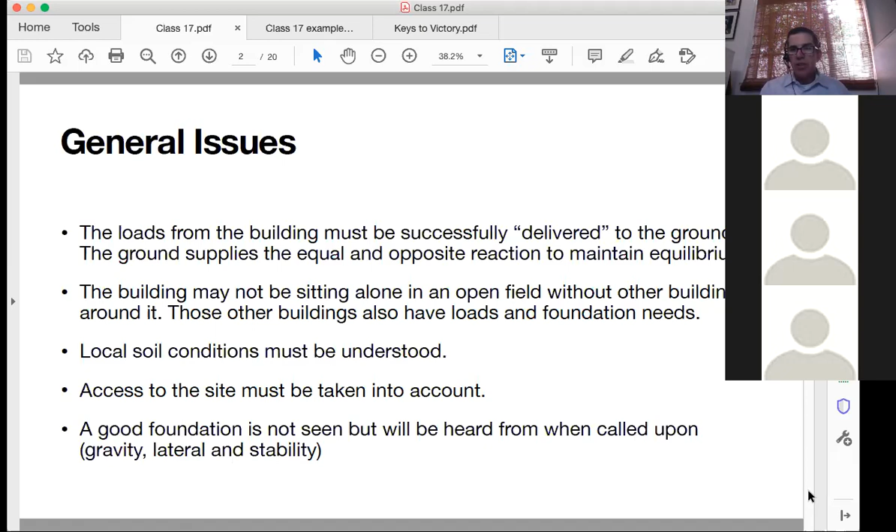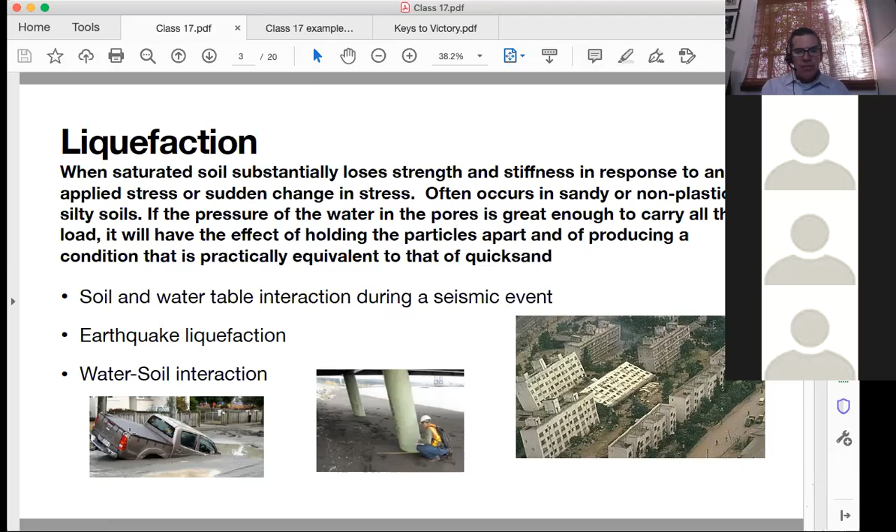So very stunning sort of pictures, really nothing to really do a whole lot with what we were talking about today, but just sort of shock value, I guess. So from a construction point of view, excavation, site shoring - these are the topics that we'll be going over today.

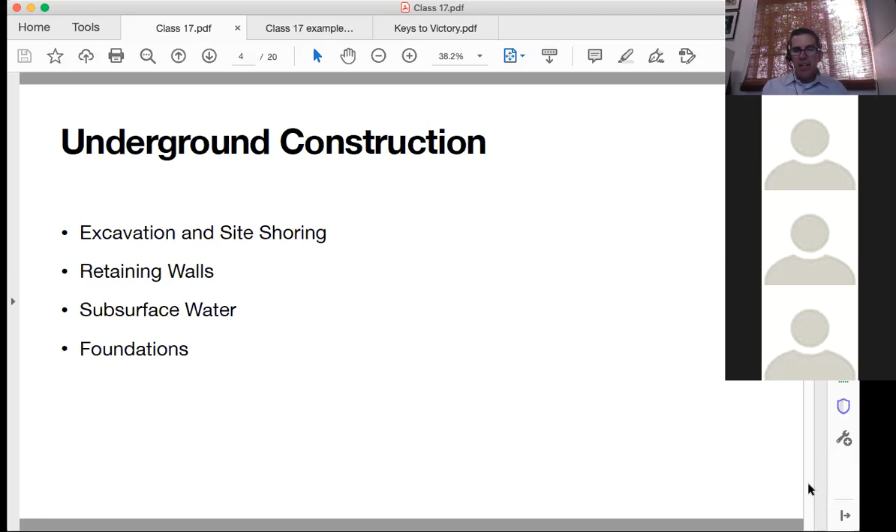We'll look a little bit at retaining walls. We'll go very lightly with subsurface water - it's actually quite an interesting topic, but we're not going to spend much on that. And then we'll do a little bit here. This will be with the calculation at the end, a little bit with some of the foundations, sort of a little bit more typical foundations, some column foundation, and then a caisson or a drilled pier.

So often with projects, especially large scale ones, there's an issue with excavating, either foundationally to get down to bedrock, or because the building is going to have a subterranean component to it, and that excavation could be on a slope. Just think if you were to not dig on a slope, then you would basically be creating a cliff, and that cliff would have instability. So the sloped excavation might be used.

If not, then vertical shored excavation could be used, and we'll go over what this sort of temporary site shoring would be called, and this would be something that's engineered, which then gives for really kind of stunning pictures.

So some of the excavation process - these temporary site shorings would be, kind of read these five that we're going to look at, get you exposed to some vocabulary.

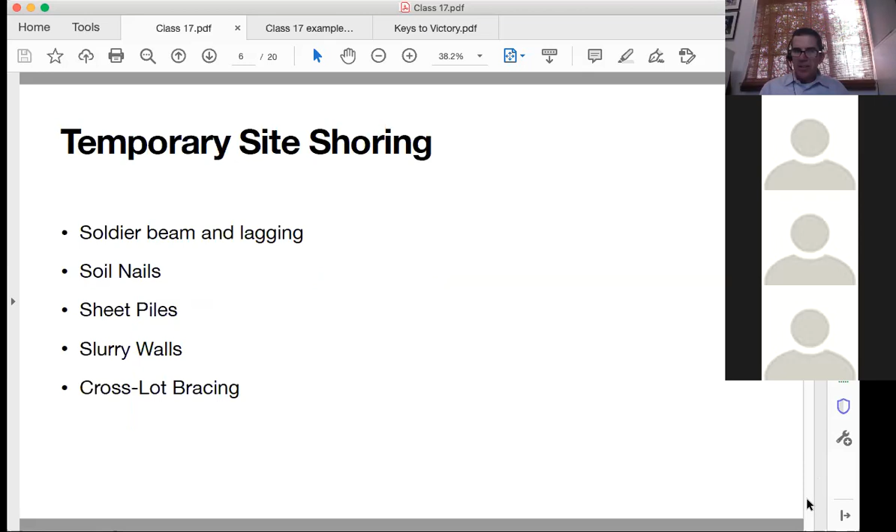That last one we saw, the first one, had quite a vertical wall. Not all are going to be that drastic or large.

So it's the soldier beam and lagging. Where that soldier beam is, really it's a drilled pile down into the soil, and then as you excavate...

...they're able to fill in with lagging, it's called. So you've got drilled shafts for the soldier beams. Those are I-beams, and then they're spaced such that you've got wood lagging that's going to be put in there.

That then would be shoring the site. The lagging placement depends on the height and how much lateral pressure you end up with from this earth. That earth really wants to move in this direction, it wants to fall this way. And the further down you go, the more pressure is present.

It's kind of analogous to the deeper you go in a pool, how it hurts your ears. So you end up with more pressure down here. Sometimes you may need a little bit more assistance from the bow that could occur, so you may end up with tiebacks that need to be inserted.

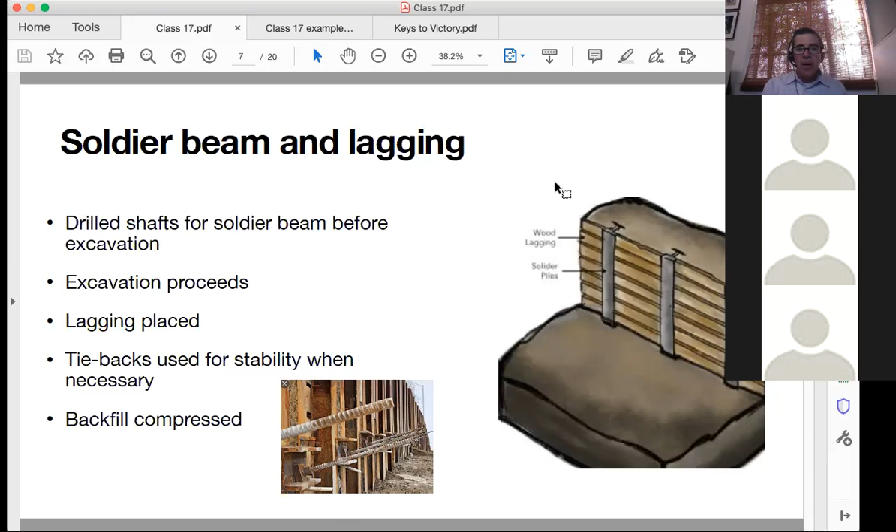Another one would be a soil nail wall. Those tiebacks in the other picture were less frequent - you don't see any up here, but you see a row of them here. They're spaced, relatively close to each other, but from a vertical distribution they're not as closely spaced as a soil nail wall.

This excavation occurs in layers, about 5 feet at a time. So here you're just seeing the very end, after they've excavated the entire thing. They start up here a row at a time, and as they go, install the soil nails in each of those, about 5 to 6 feet in each direction.

So you think of the 5 by 5 spacing, and then apply a thin layer of shotcrete with each layer of excavation. It's kind of like nailed, but you see the frequency of those - very different than a tieback. Again, there's a limit to exactly how high those can go.

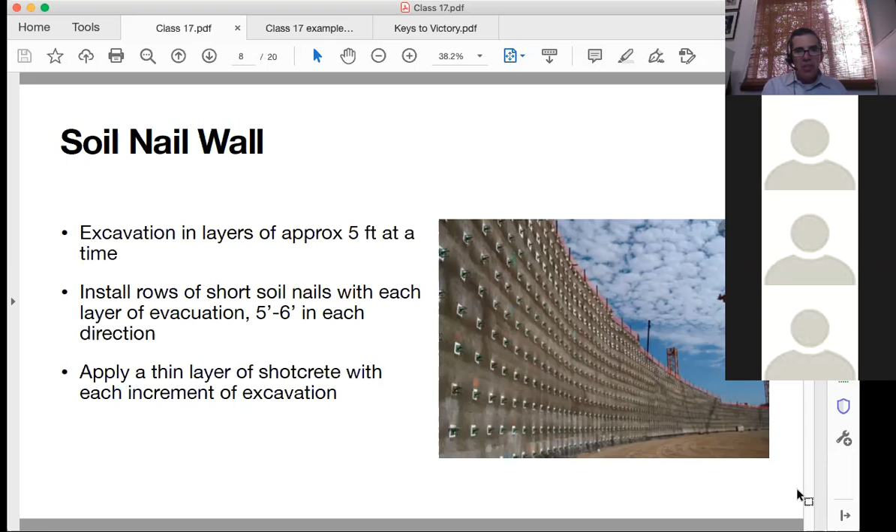You're really dealing a little bit more with just the construction issues of which one might be used, either the soldier beam or a soil nail wall.

Sheet piling can also be used, and it's going to go straight down - it's driven down in. There's a drive effect to this thing; it doesn't just sink down in, it has to be pushed down in with repeated blows at the top. We'll get to that also in another one a little bit later with driven piles.

Sheet piling can also be used as a water barrier. The way it interlocks, it's going to use the soil pressure to its advantage in that regard. Then it can be cantilevered, or it could also be tied back depending on the height of it. Gets higher and higher, then you would need to put tiebacks in.

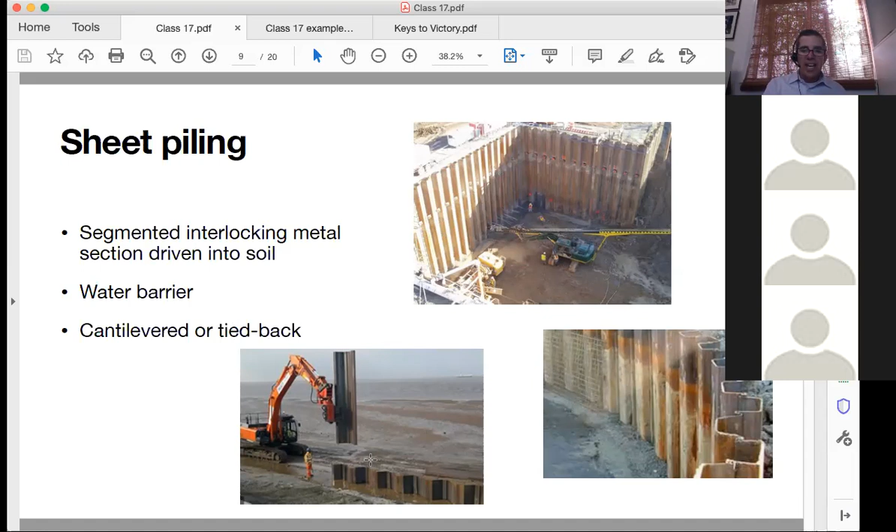Again, really more of a stability issue. Then the excavation can occur on one side - once it's been installed, you excavate on one side of it, clearly.

And then once that's all done, then place the concrete from the bottom of the trench, displacing the slurry. So that slurry is kind of like this temporary holder of sorts - the concrete is what ultimately is going to go down there to be our wall.

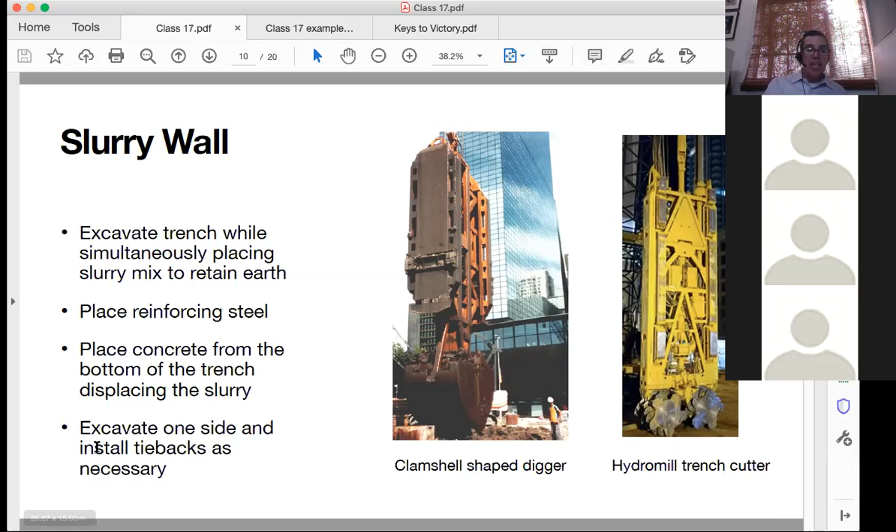You excavate one side, and you can install those tiebacks as you excavate. So that would be a slurry wall.

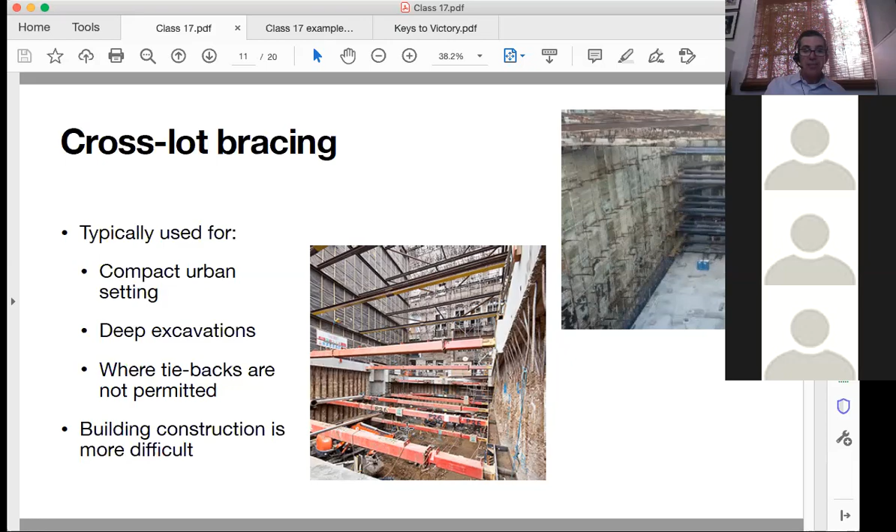Here would be some cross-lot bracing. You could see multiple types on a job site, but this would definitely be in a downtown area with high buildings around, urban settings, deep excavations where tiebacks are not permitted. It could not be permitted because there's some neighbor issue going on, and you can't get anywhere close to their foundation, so you'd have to build something without tiebacks that reach all the way back. So then just in general, some retaining walls.

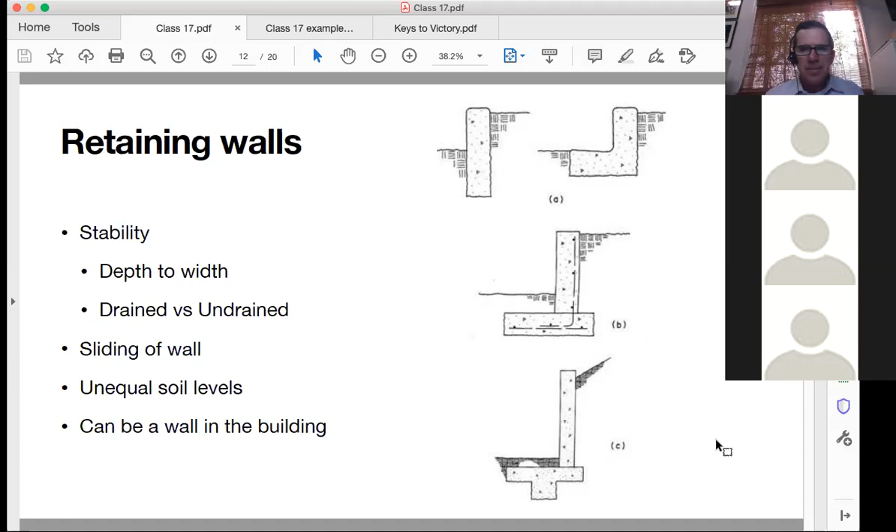All right, I'm back, thank you. I don't know what it is, but my shoulder keeps getting tight when I do this. Perhaps I never really thought I'd be doing this. If you notice my light, I got one of these babies now. So anyways, if I look a little brighter, that would be why. Okay, as my computer starts to run — I think the other thing that's going to happen as this quarter comes to an end, I have a feeling my computer is going to walk off into the sunset as well. Boy, that little feller likes to run. Oh man, poor guy.

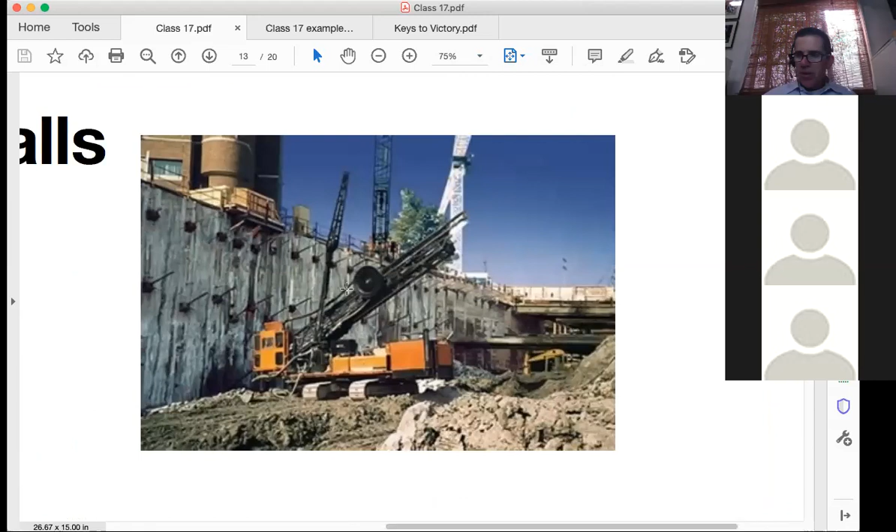So there's a little bit of a look at this thing as to where the drilling goes, and then a section as to where the bonding goes, the grout which is injected, and then the jack, and then there's a plate and an anchor head. And so that's what gives, right, getting all the way back away from the wall.

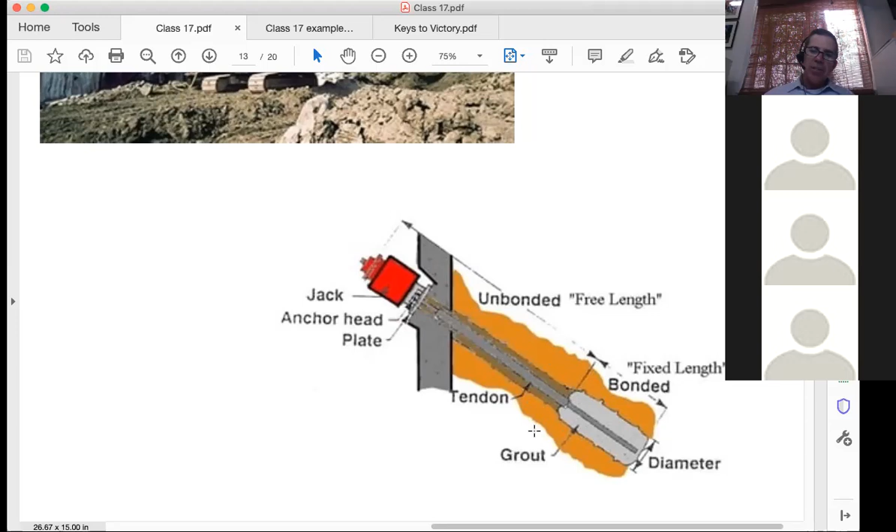And then this is the amount of bonded length. This is done to get far enough into the soil. We need to get deep into the soil so that there's not a local failure of the soil. So that's why this wouldn't just be right here, because that whole load gets distributed out into the soil. It's sort of the general theme of the foundation process.

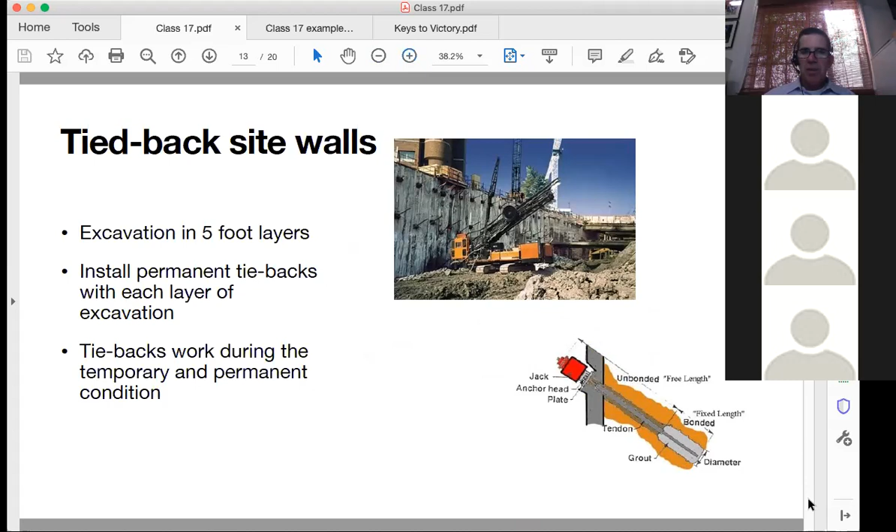But here, same thing with these tiebacks, so give you a look at that. That's why that would generally be something pretty expensive due to the machinery, and that's why we had brought up that issue about access to the site as well. So I'm just going to go quickly on this with water.

It could be a water table issue, which is present even if you can't see it. And then sort of the idea of the local and then the global, so that you can have localized failures or water, global failures in water.

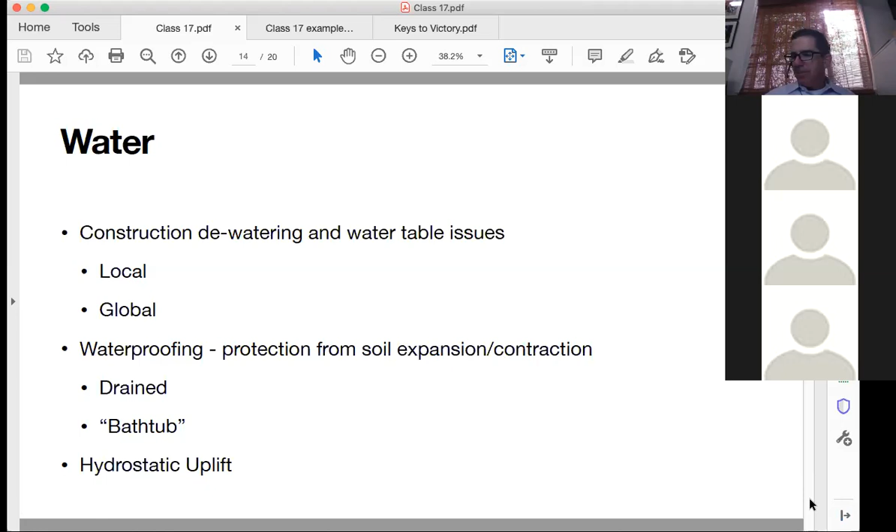And so the issue comes down to the expansion and contraction of the soil. So when the water leaves, the soil then contracts. As it's there, then there's expansion. And so the other side of that is, if there's soil expansion, that actually pushes on your building, and that would be what's called hydrostatic uplift. So not a huge amount to worry about there, but an issue nonetheless.

All right, getting into the home stretch here. So we're going to go a little bit with foundations. There'll be a little bit of calculations on the back end of this. So this is the piece that we'll do. There'll be a little bit of this on homework 4, something that deals with a foundation calculation.

So this is where those loads are transferred to the soil. They could be in multiple directions. Primary failure is going to be settlement. When we say settlement, it would be the structure settling on the soil. This is why, with high-rise buildings, those are drilled foundations that go all the way down generally to bedrock, so that there is less of a settlement issue with the weight of the building settling on the soil.

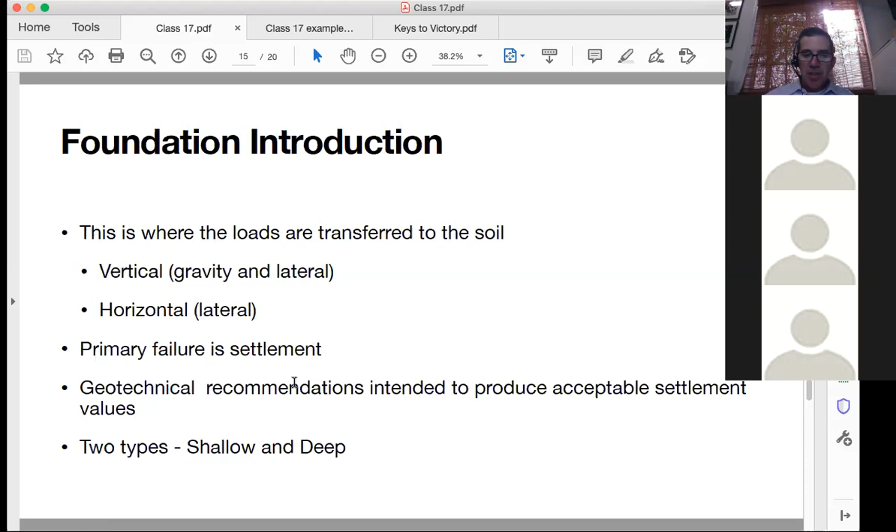This is where a geotechnical engineer would give the values. There'll be an allowable bearing pressure that we'll talk about, and then also an allowable friction, so shear stress, and two types, shallow and deep. So we'll go through both of them.

So this would be footings. You see with a column slash wall footing, it could be combined, very much most common. And so you see here the pad, the footing underneath the column, which will eventually tie to it. Now these are rebar that's permanent, that's been cast with the foundation. And so there'll be a cold joint there, and then you'll have more rebar that'll go to the column above.

And to do this, we need adequate soil bearing pressure. So this really just sits, now it's embedded in there. It's not stopped right there, but at the very bottom it's just sitting, sitting on some soil, as you see here, where something would be poured and then it would be filled again. So this is not going to be for something substantial, but from a size standpoint.

And so we're talking about the pad here. The area is going to be the load divided by the allowable bearing pressure. So the pressure is going to be like in pounds per square foot or kips per square foot. That load is the load in the vertical direction that we would know is being delivered from the structure—gravity and seismic, depending on if it were part of the lateral system. And again, there can be a combination.

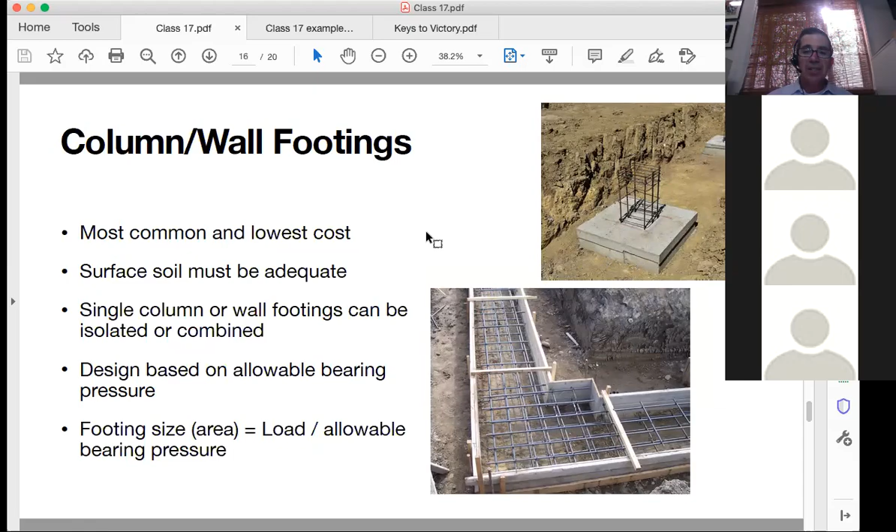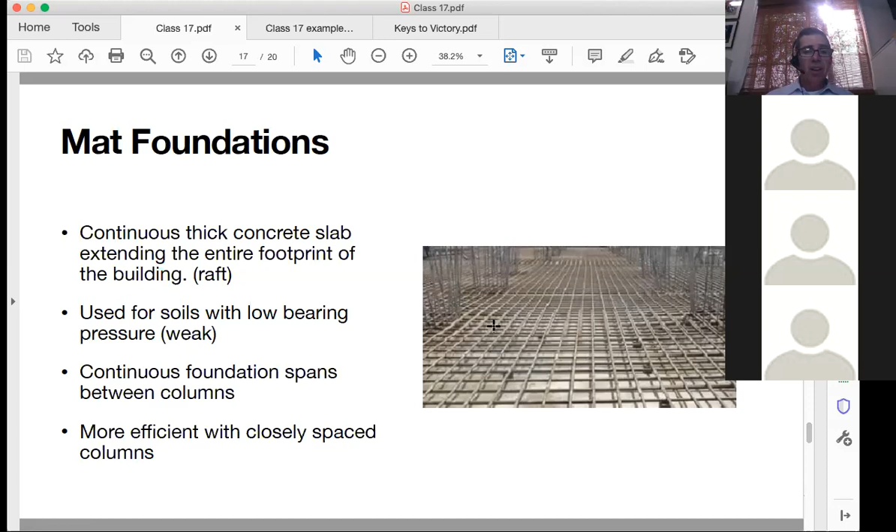So in a situation like this, if you had weak soil, the cost is that between the columns it's a continuous span, so that all has to be continuous and act in a monolithic fashion. It'd be efficient for something that had columns closely spaced.

Often used on large construction projects like hospitals. Deep foundations - those first couple were all shallow foundations with little excavation needed. Deep foundations include drilled piers, caissons, and driven piles. Generally these would be higher cost, but used to get to bedrock when necessary, but also just to help with increasing surface area for settlement and uplift.

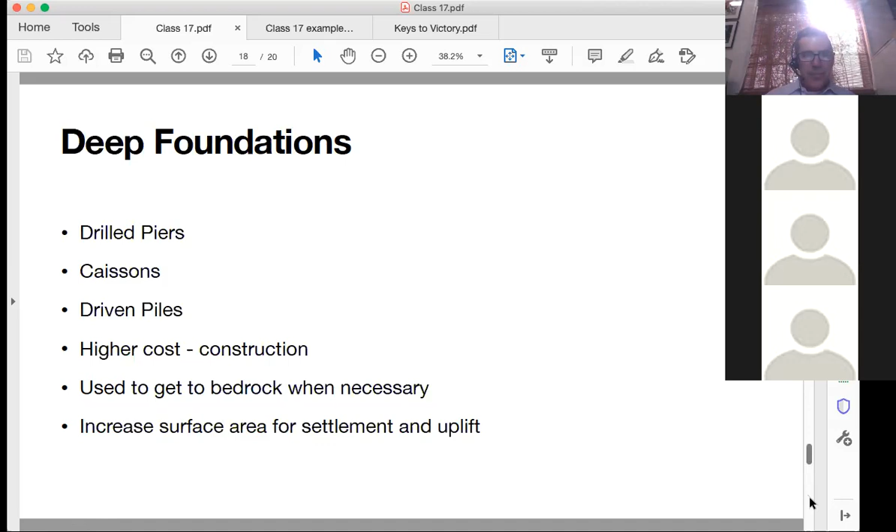So we'll talk about the two ways that these are generally designed. Let's take a look at all of these here. So a drilled pier, exactly what it sounds like - that's a huge drill that is turning, right? Going straight down.

So it's a straight or belled drilled shaft is what these would be used for. They're going to be filled with concrete, reinforcement steel cage. Casing might be needed to prevent the soil from caving in on itself. Now, I'd highlight this word relatively quiet. I mean, you'd think that would probably make a little bit of noise, but compared to the driven piles, that's why we'd say relatively quiet.

Two ways that the analysis would occur here: if it's based on friction, right, friction that would be on the edge, on the surface of the foundational pier. So the length is going to be equal to the load divided by the allowable friction times the diameter.

I think I have that wrong. Give me one second here. Actually, let me hold off on that. Hold on. So I've got that wrong, actually - that would be the circumference. Sorry, that would be the circumference. You'll see that, we'll do an example on that. Sorry, got that wrong.

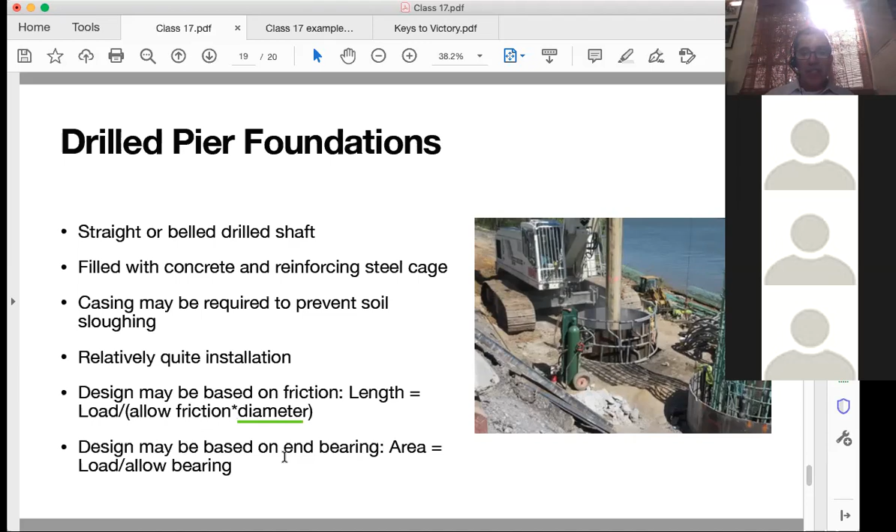Driven pile foundations - this looks like a lot of fun. We would end up with driven piles - we've got kind of an end result picture here. And so literally that is just going to pick up a weight and smash it down, and it's going to drive continuously down into the ground. This is why on that previous one, when we said relatively quiet, this would definitely not be quiet in any sort of fashion.

And so these could be precast concrete, or it could be steel that's being driven. Obviously, if it's being hit, there's a stability issue with the concrete or the steel, such that it doesn't buckle.

So it could be, in the end, based on end bearing or on friction. Allowable load is set by the geotechnical engineer and confirmed by driving resistance - actually, they'd be able to tell how far with each hit. It becomes a physics problem, an impulse momentum type of problem.

For any engineers out there, I think Allison might have a little bit of a mechanical background, so I do know that would be an ME212 problem right there. So that would be the driven pile foundations.

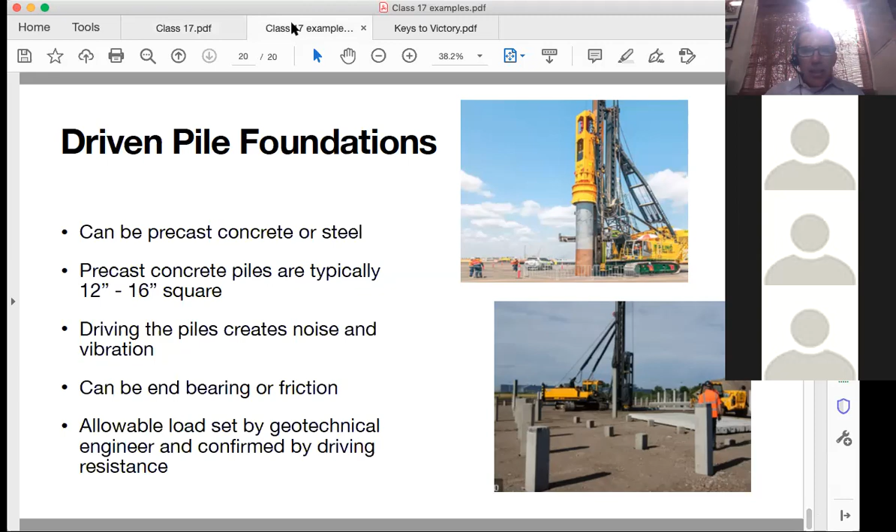So let me see if this will flip.

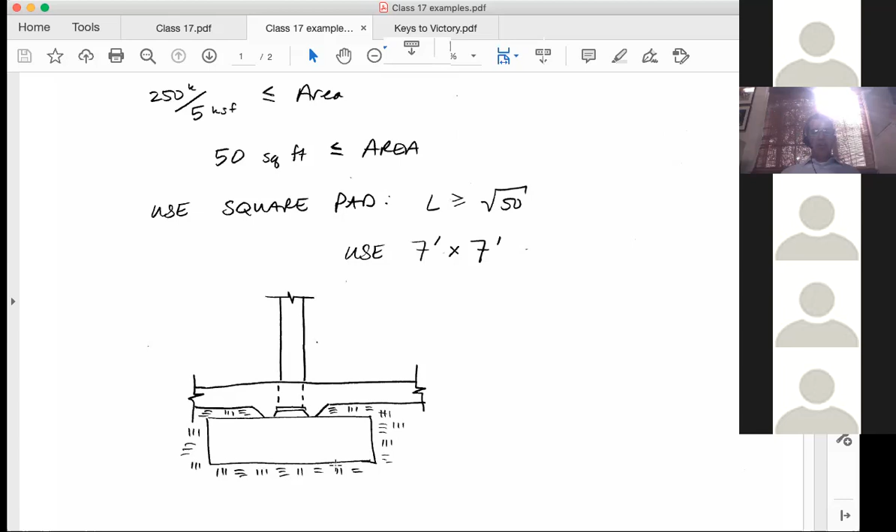But down here, that bottom, that's now where this load, which is coming down, is going to be resisted down here on the very bottom of this footing. So you see how there's more surface area down there on the bottom. So that's what we're about to go through a calculation on.

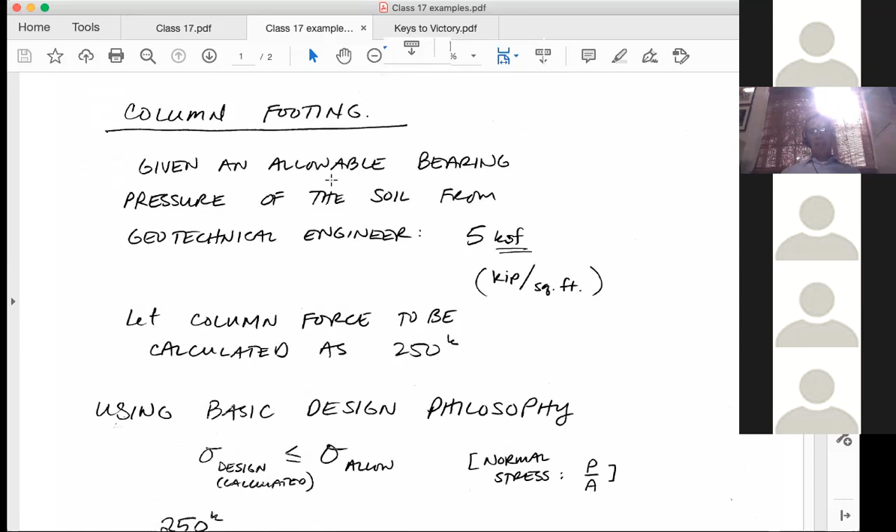So given an allowable, let you read that. The geotechnical engineer gets a soils report, and you're told the allowable bearing pressure. Now the allowable actually also incorporates a factor of safety. So it doesn't mean that if we were at 5.1 kips per square foot, we would have a failure, like our soil would not be able to bear. That's just the allowable, generally that uses a factor of safety. So it's quite multiples more of that before we would start to get into a failure type of area.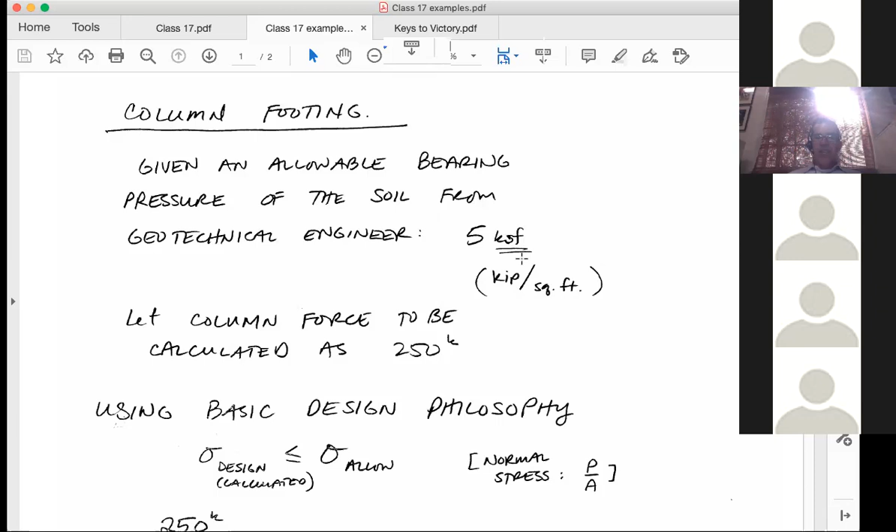So just keep that in mind here. That's an allowable, sort of a working value. That's not the ultimate value.

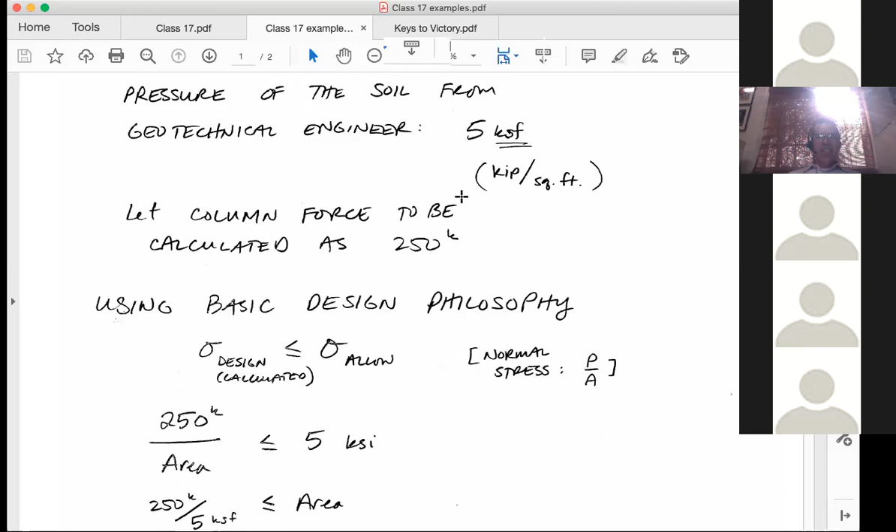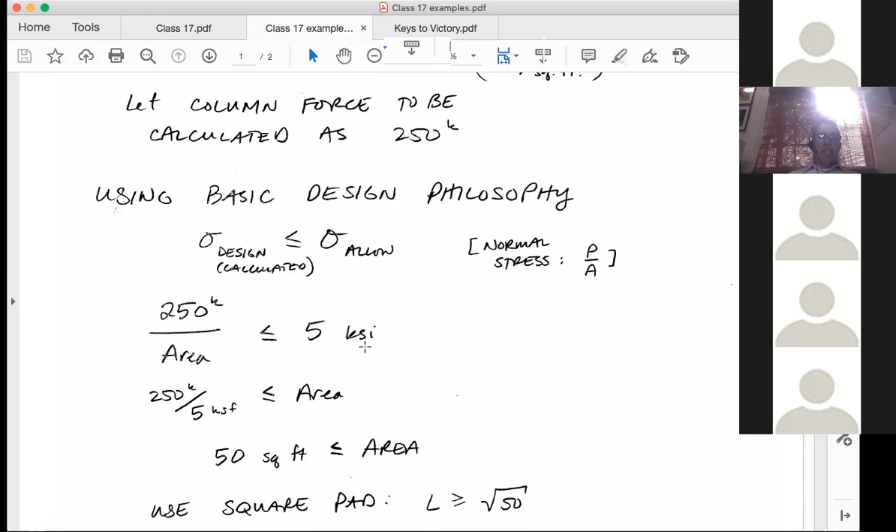So let the column force be, let's just say, 250 kips. Just basic design principle, right? The calculated, the design value needs to be less than or equal to the allowable value. So the calculated, what we calculate in our structure, this is the allowable stress design. So normal stress, P over A. This is a load from the column, could be a factored load, divided by the area, and that's the area at the bottom of the footing, and that would need to be less than or equal to 5 KSI.

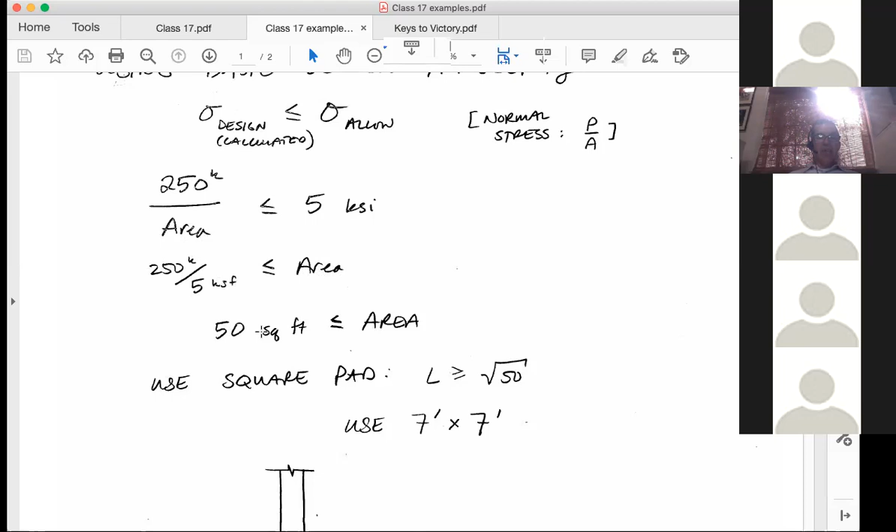And so a very simple kind of math, area will come up here. So the area needs to be greater than or equal to a little bit of math. This is kips divided by feet squared. So we end up with 50 feet squared. And if we've got a square pad, so where it's L squared, area would just be L squared, so L needs to be greater than or equal to square root of 50 if we use the square pad.

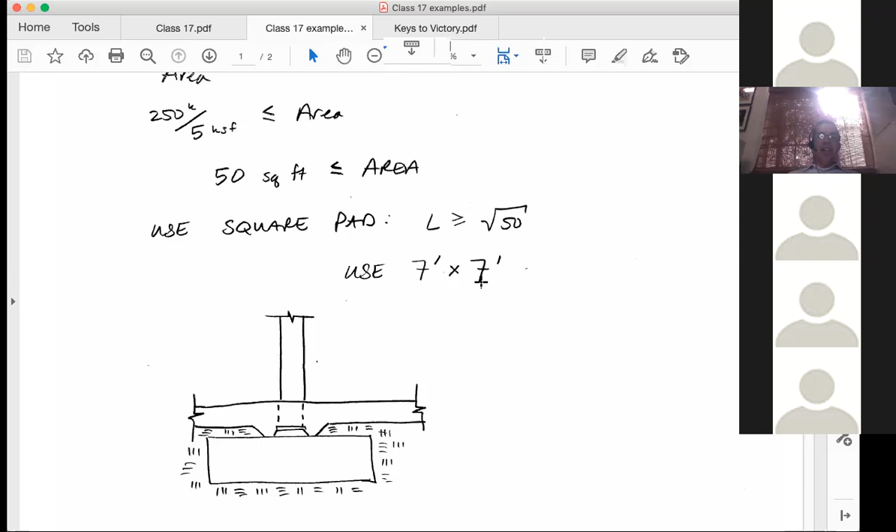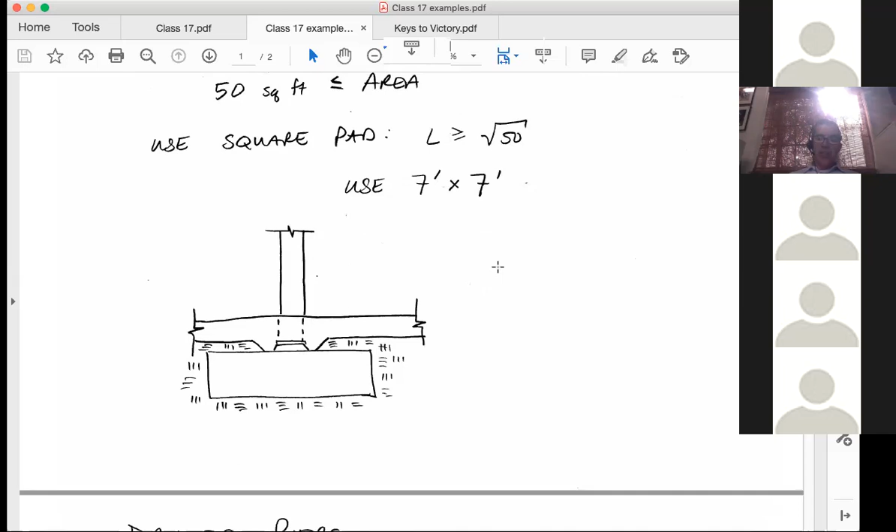All right, and then the last one here would be a drilled pier. I'm going to give you the picture of it here on the right. This would be a drilled pier of some length L, right? That drilled pier has some diameter and some length. Let's kind of take a look here.

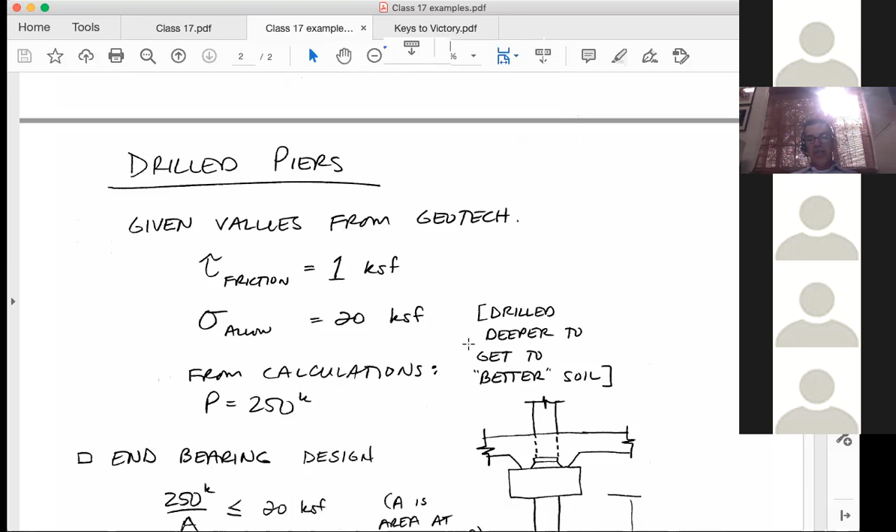You're given from the geotechnical two values: the shear stress, let's say the allowable shear stress, it deals with the friction, it's going to be 1 KSF, kips per square foot. The allowable normal stress, let's say, 20 KSF. And again, we have drilled deeper, one way to get to better soil.

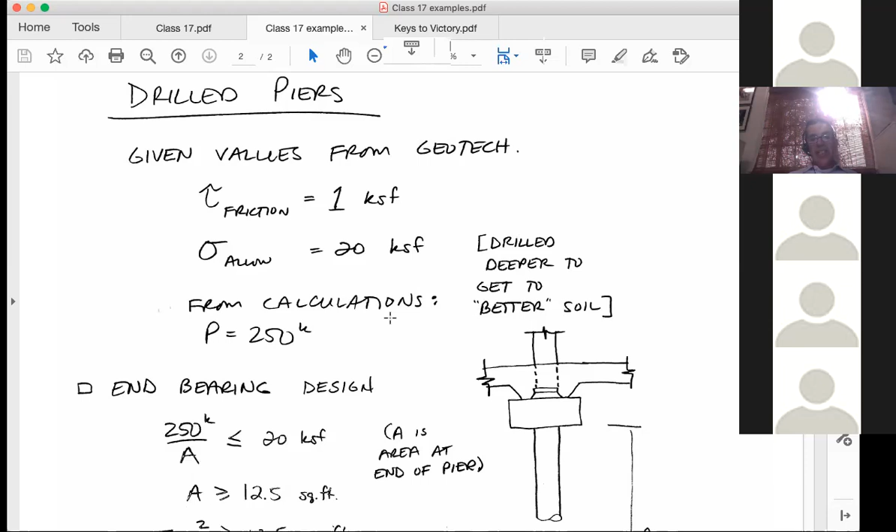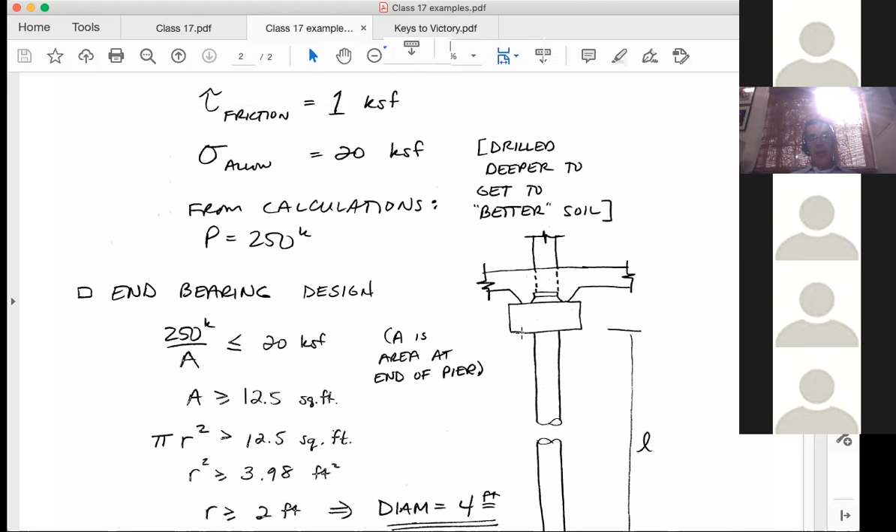Let's go back and say we've got that same 250 kip force from the column coming down. One reason we have to do this is because we've got bad soil up top, so we need to get down to better soil. This will be done two ways. One: we know we need to go down some length L to get to this 20 KSF, kips per square foot, allowable normal stress, or bearing stress. We need a certain diameter of our drilled pier to be able to do that.

So we've got P over A again. That's the force from the column divided by the area at the very bottom. We'll use pi r squared in a second. The calculated stress needs to be less than the allowable. So we do a little math, flip it, invert it, and keep A over there. So A needs to be greater than 12.5 square feet. Then to find the radius, I use pi r squared. A little math gets me to about 2 feet for the radius, so I end up with about a 4-foot diameter.

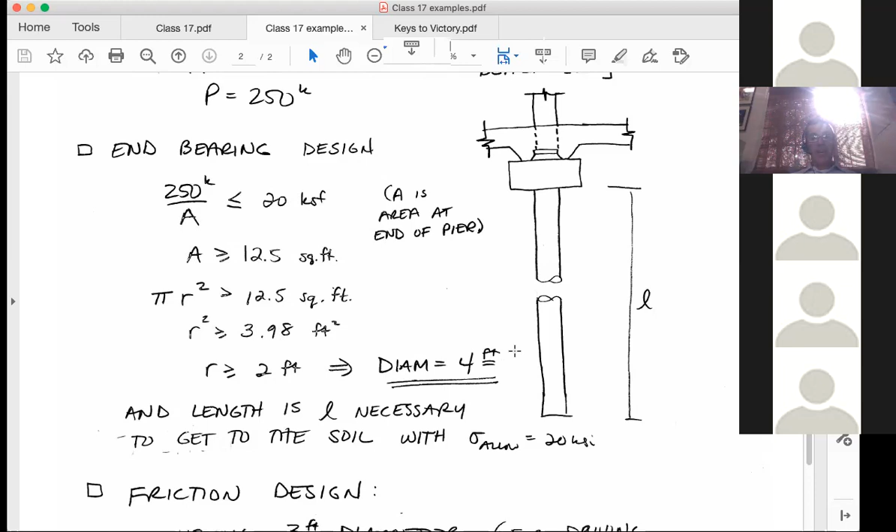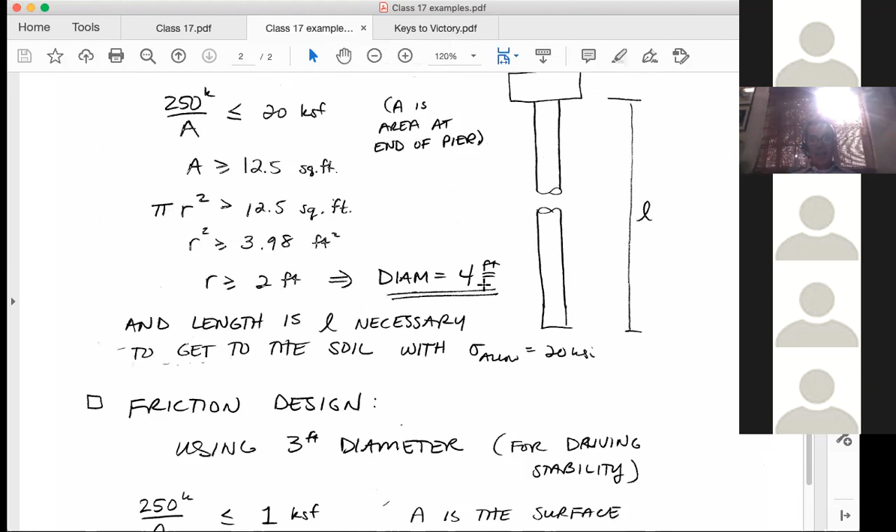So that'd be one way to design this. We'd end up with a 4-foot diameter, but the caveat is we'd need to be able to go all the way down to whatever L was necessary to reach that soil. Another way to do it is if we were given the shear stress, or friction, that is allowed for the drilled pier - also called skin friction.

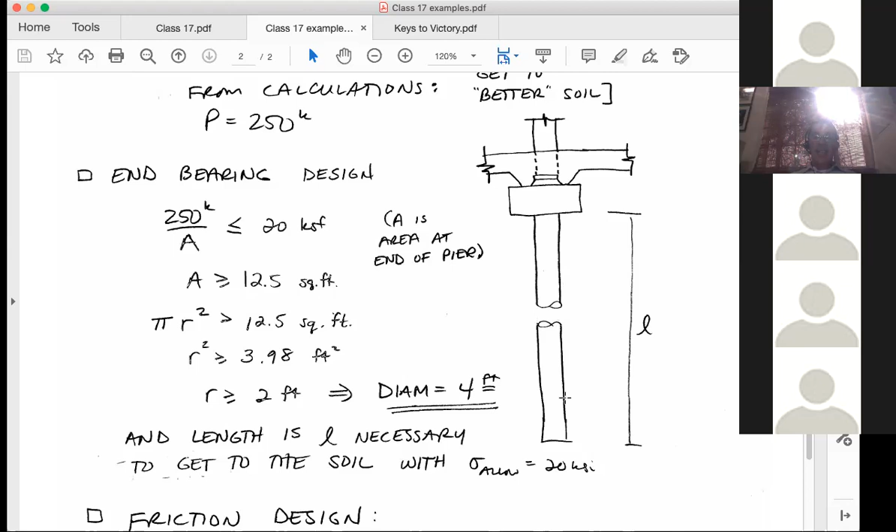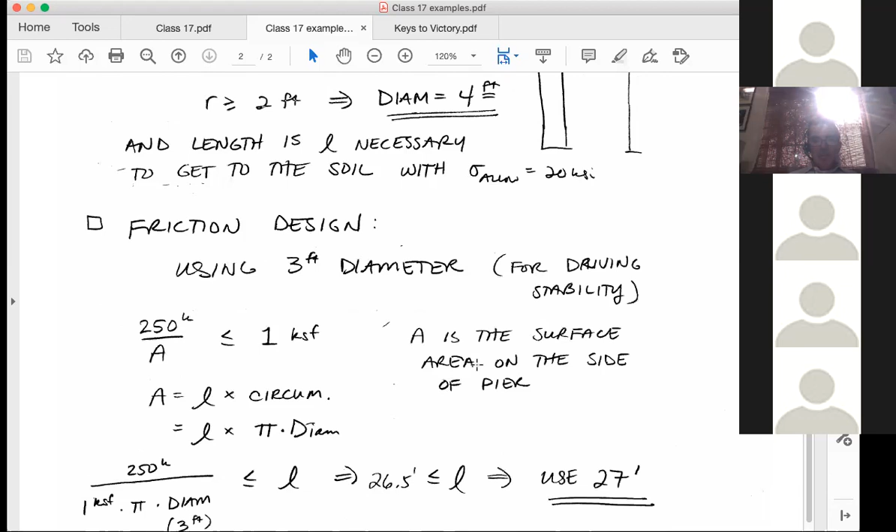We're going to need to use all this area here. If you think of this thing pushing down, the soil is pushing up against it, and we'll assume it's constant. It actually wouldn't be constant in real life - it would be some distribution, but then we'd get into integrating, which I don't think we want to do. So for this one, we'd say we're going to use a 3-foot diameter because of the stability issue. This would need to be told to you - we're not doing a stability analysis here. Now we've got the shear stress, which should be the shear force divided by A, where A is now the surface area, not P over A.

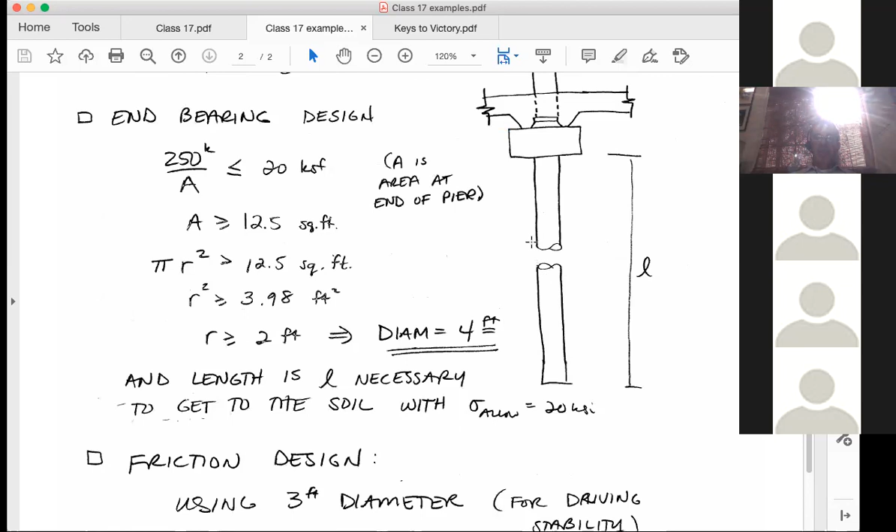Now we're into the shear stress. This would be the shear force, same as the column force - just now the force being transmitted across, or on the edge of, the pier. And A would be the surface area on the side of that pier, which is L times the circumference. This is what I had incorrect earlier - I had diameter there. So it's L times the circumference, which is 2 pi r, or pi times d. That's how we end up using our information about the diameter - it fits in there. So all we've done is our math, and if we were to do it this way, we would need a 27-foot long drilled pier. That's how we'd end up designing these two.

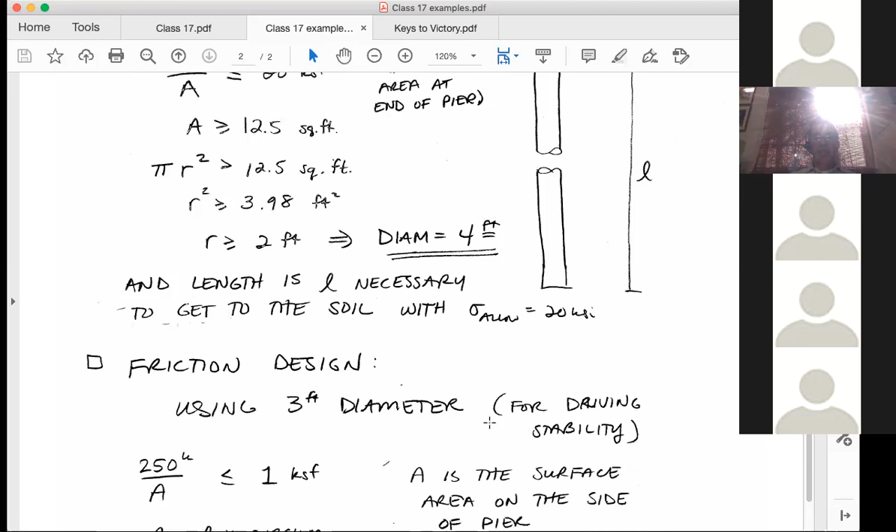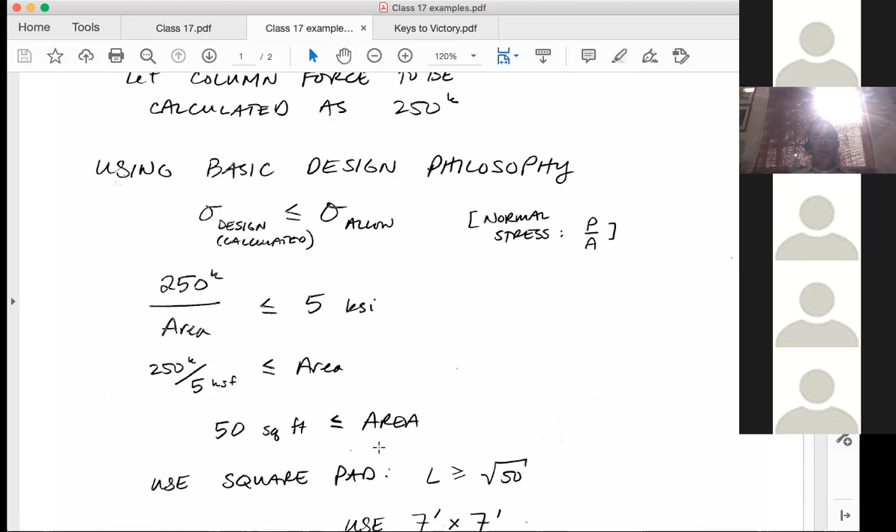So again, a drilled pier can use bearing pressure or friction. And then here would be a column footing, a shallow footing, and that would just be bearing pressure right down on the bottom there. All right, so I finished a little bit early.